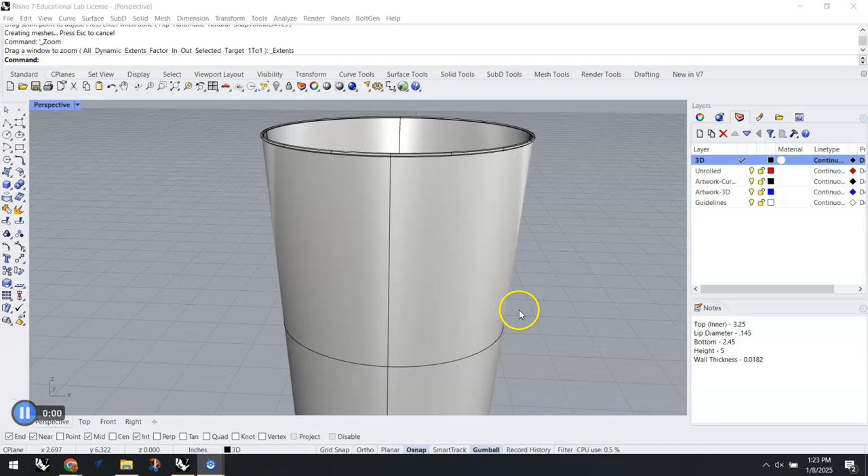So in our last assignment, we modeled our laser engraved cup in 3D. For this one, we're going to go through and render it, so we're going to make it look like the cup looks in real life.

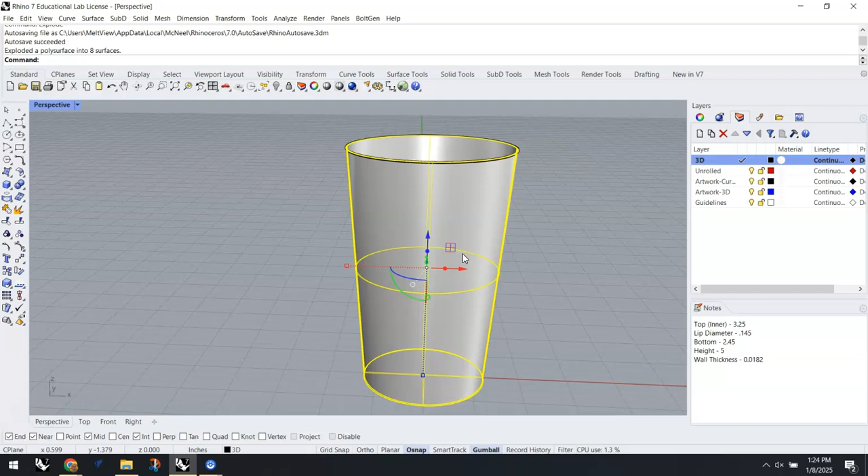Before we get to rendering, we have to split our model into different sections based on how they're going to look. So what we need to do is take our cup and explode it. Explode is the command, and when we do that, it breaks it into a number of different surfaces.

So if we look at our cup, the outside of it as well as the bottom are whatever color we selected, so I'm going to select those. There's one side, there's the bottom, and typically when you have a surface like this, it splits it into two, so I need to select the other one and join those together.

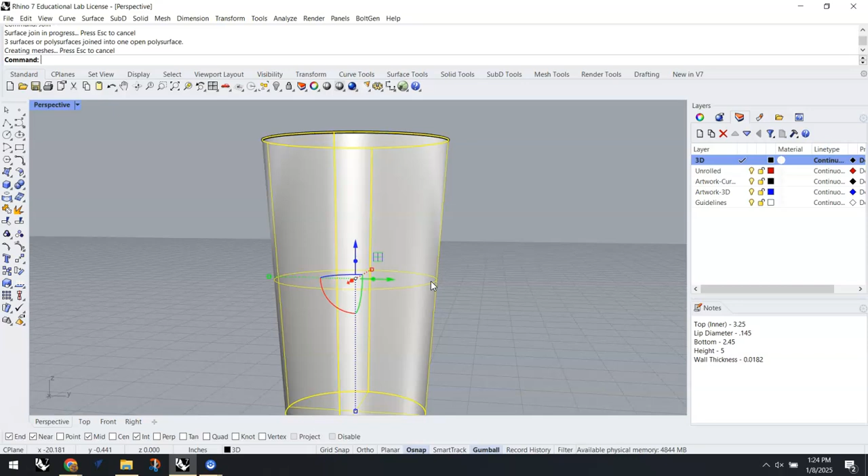Now I need to join the inside and the bottom together. Because we have a closed poly surface here, we cannot join this with the inside. But what we're going to do is Control A to select everything, deselect the outside, and then join. So it joins this into an open poly surface, but you notice it doesn't select the top as well.

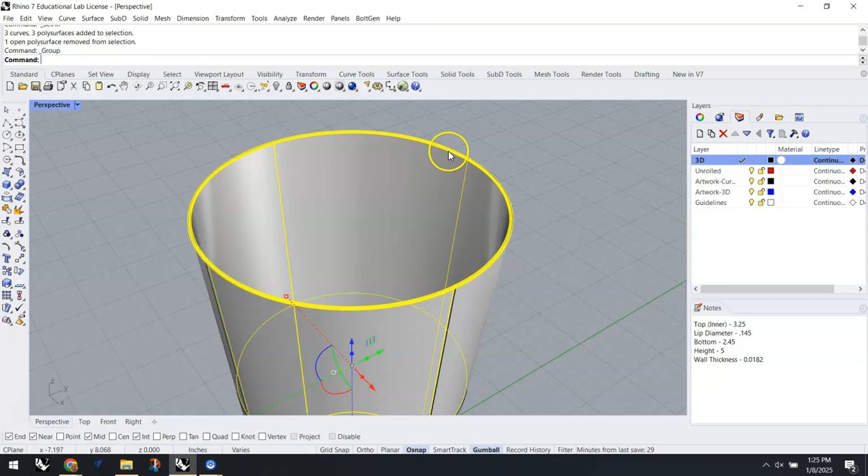So I'm going to do the same thing, deselect that, and group those together for right now. So the inside and this lip are grouped together so that we can do that all in one.

Next thing we need to do, up here on the perspective tab, we need to change it to rendered, and you notice it looks white. Over here next to our layers tab, we should have a materials tab, and it looks like a little tube of paint. If we click on that, it brings up a different looking menu, and I'm going to drag my notes down even smaller so I can see more of this menu.

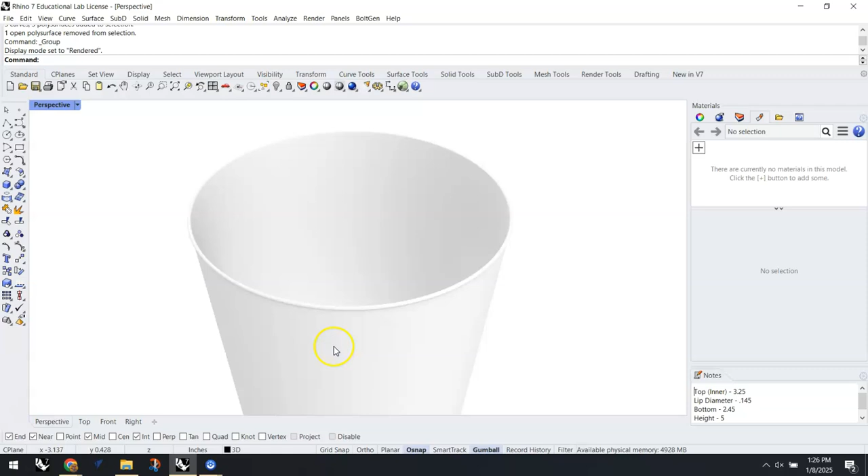So I'm first going to do the outside of the cup. I'm going to click on the outside, you can kind of sort of see that it highlights it. I'm going to click on this plus in the Create a New Material tab, and even though this is painted, I'm going to use plastic. I like to use plastic because it gives us a couple more options of things we can do to change how it looks, so we'll click plastic.

We can see our menu here. Right here where it says color, we're going to do the color picker, and we want to find a color similar to the one we've selected. So I have the red cup, I'm going to click on red, but this one's a little bright, so we'll click around here. That looks pretty close, so we can click around here and pick one that we like, or change some other values over here. I'm going to hit OK.

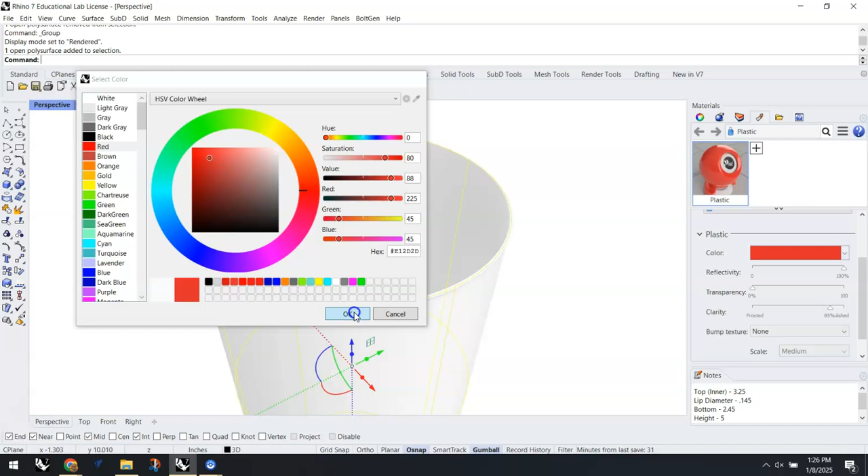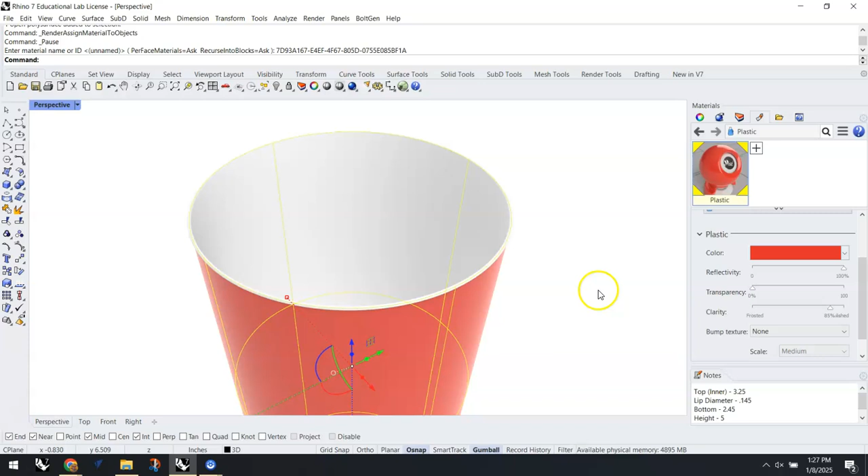And then to get it to actually show up on the cup, I need to go over here next to this blue and white question mark, there's these three horizontal lines. If we click on that, the very top option is assign to objects. When we click on that, it applies that color, texture, whatever it is, to that object.

And now here's where I like using plastic, because we can play with the reflectivity, transparency we shouldn't have to mess with, the clarity, and we can add a texture. So if we're doing something that's powder coated and has a little bit of a rough texture, we can add some bump texture to it, so we can make it a little less reflective, make it look a little more frosted.

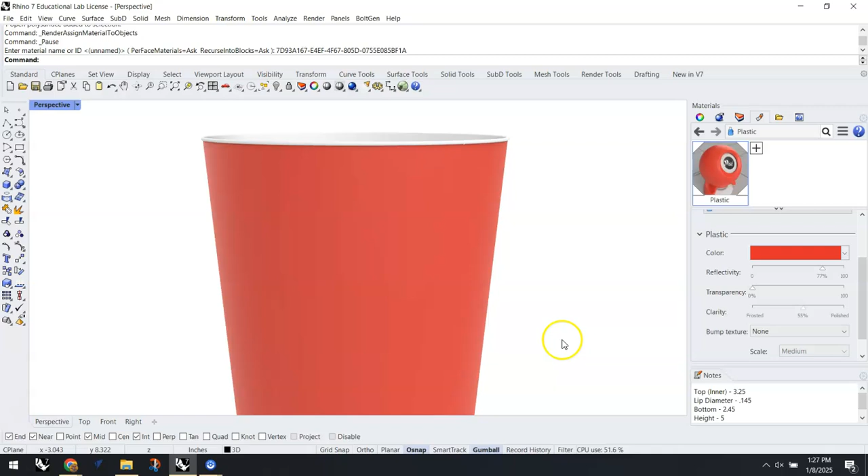Okay, for our purposes on this one, we don't need to spend a ton of time here because it doesn't have to be perfect. We just want to get it close. So we've done the outside and we've done the bottom. Now we need to make the metal, the inside, look like stainless steel.

So we're going to highlight that, click on the plus for Create New Material again, and this time we're going to select metal. We scroll down a little in the color picker and notice that it gives us actual metal names. That's stainless steel, so we'll click stainless steel and do OK.

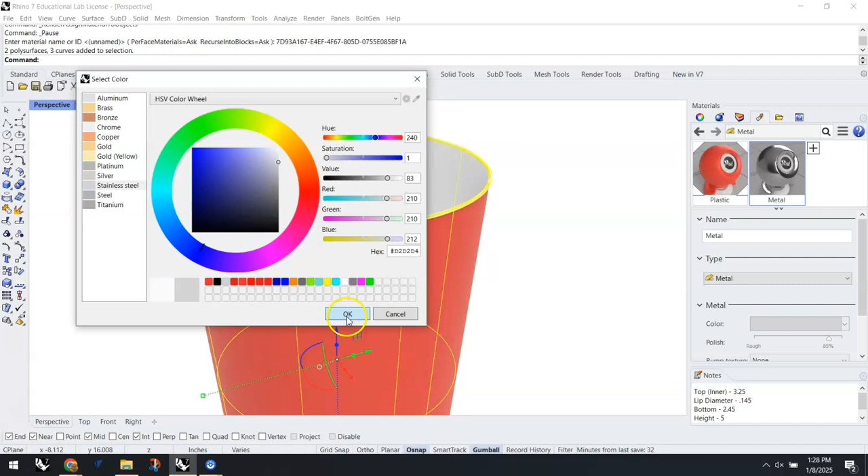And then click on our three horizontal lines and assign to objects, and you notice it makes it look shiny. Here you can play with the polish to make it look more polished if you want. For as small as that is, since we haven't played with lighting, you're not going to see a ton of difference there. Okay, so far we've added color to our cup and we've added the inside.

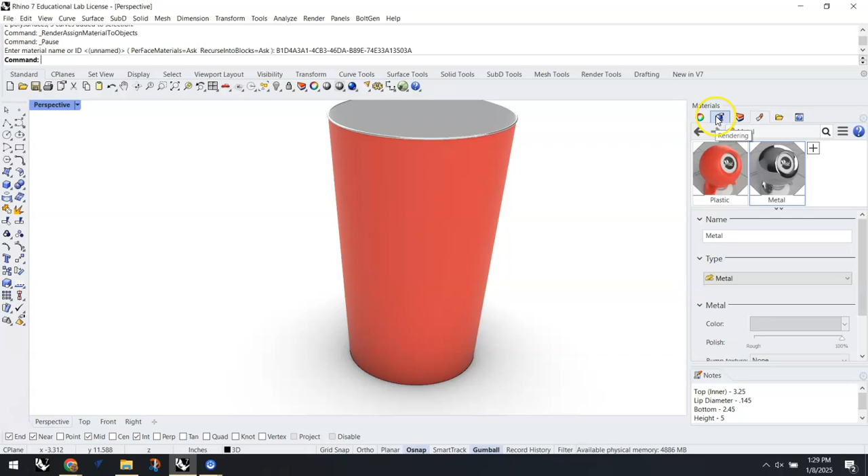Next thing we want to do is make it look like it's sitting on something, like say a countertop. So to do that, I'm going to go to the Rendering tab, which is a little blue sphere with the hand on it pointing to it, and I'm going to scroll down a little bit.

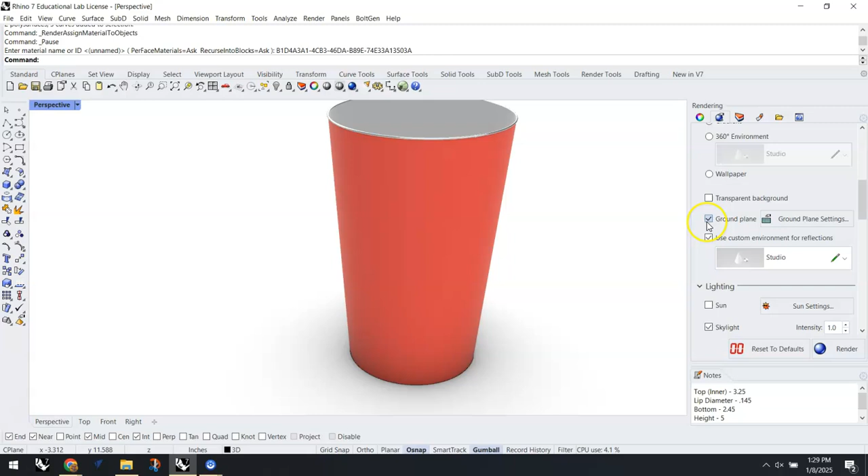If I want to make it a solid color, I could do that right here, but I'm going to go down and find where it says Ground Plane. I want to make sure that is checked, and then next to it it says Ground Plane Settings. If I click on that, it brings up a submenu. Click on Use a Material.

Here, if we go down to Type, we're going to go More Types, and then in this other submenu, Material Type Browser, we're going to click Import. You notice we have a bunch of folders of different types of materials. Organic, if you wanted to have it sitting in the grass, you could do that. There's architectural stuff where you can get different house-type materials.

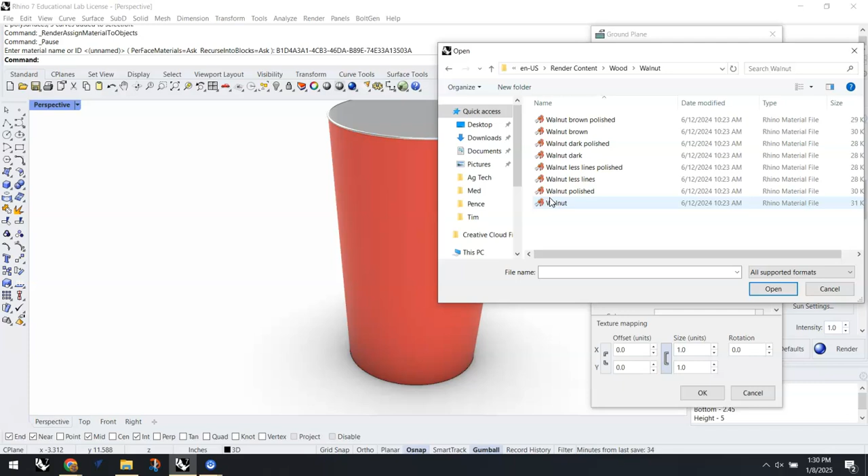I'm going to go down to wood. I'm going to assume I have a wood countertop, and I happen to really like walnut, and I like brown polished walnut. So I'm going to double click on that, and you notice it puts what looks like walnut on the bottom of my image here.

Now if I want to change how this looks, there's a number of ways we can do that, but probably the easiest, if we go down here where it says texture mapping towards the bottom, we see size, units, and it has some numbers. We can change those numbers, and if we do that, you can see how it changes how much that repeats. So right there it makes it look like the grain's not quite as tight. So we can change that, we can play with that a little bit if we so desire.

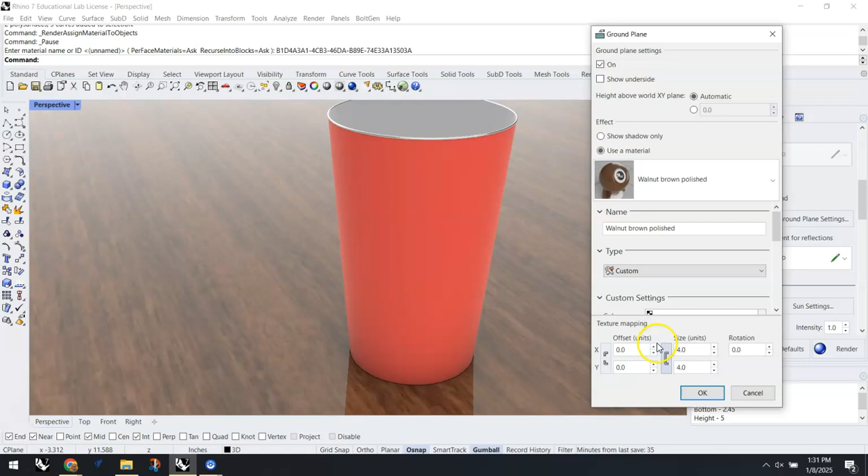We do want to make sure that this button right here is clicked so that they're joined together, so if we change one, it changes them both together. Otherwise it can kind of stretch and skew things. But that's how we would do that. Hit OK, that'll go away.

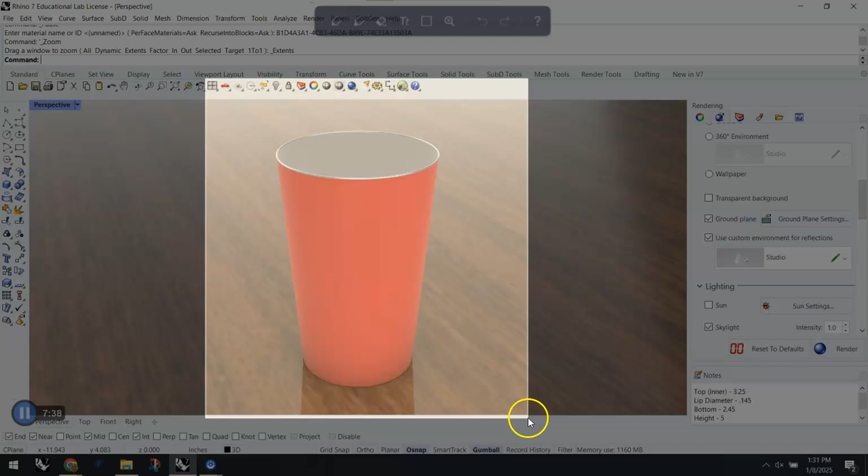So now we have just rendered the cup. There's some other things we could do, we could play with some lighting if we really want, but we don't really need to. So at this point we're going to take a screenshot of this and save that screenshot, and that's what you're going to turn in for our Solo cup rendering project.